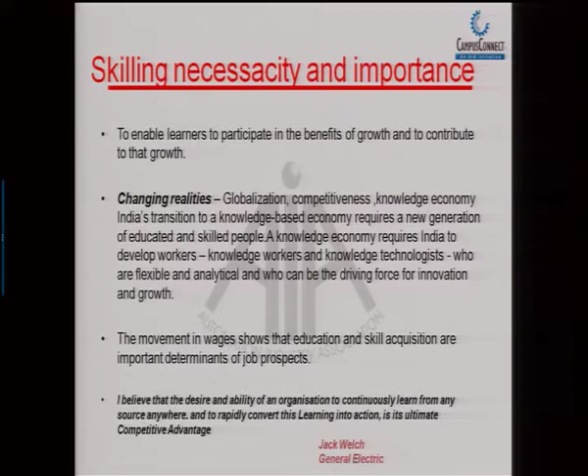In today's world, if we are not competitive, or the industry is not competitive, they are nowhere - they get outbeaten and lost. In order to be in that competitive race, one has to be continuously learning and able to acquire those skills and put them into action. That is where the need for skilling is necessary.

First of all, from the organization's point of view, why do we train? We train to prepare our workforce to be effective in the markets, agile and responsive to economic changes. This is the main criteria - that is, in turn, organizational readiness.

If people are able to put themselves or are agile enough to accommodate various changes, that is their organizational readiness, which comes from two factors: motivation and knowledge. Motivation has to come from within or has to be driven. The knowledge part has to be acquired through training, through skilling. All these things have to be included for an organization to be ready to meet its challenges.

If you look at how training scenarios are changing, the demand for training has become incremental - it never stagnates. Technologies are upgrading so fast that naturally if people stick with old technologies, they are unable to cope with the situation.

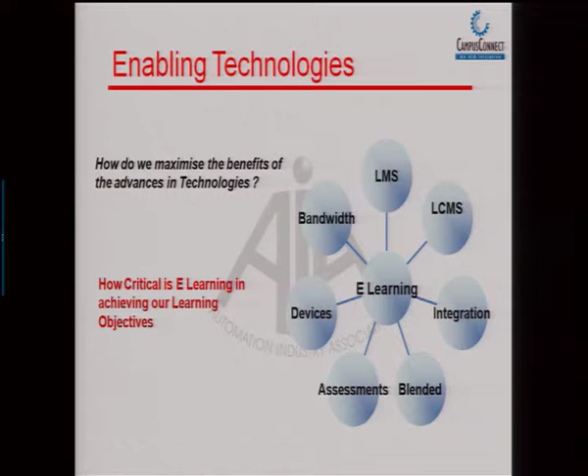Now looking at what this blended learning is, and what its benefits are, you see that you have a reduced learning time. Why reduced learning time? Because the more senses you involve in your training process, the better the learning is. If you just use your hands and do something, that's somewhat okay.

If you also have something to hear, something to see, and all those things, that makes your training complete. So the training effort has to incorporate the maximum number of senses available to you in the learning process, by which the training can be more effective and more retainable.

In order to do this, e-learning is one of the processes. What happens is, you have visuals, you have audio, and along with that you are working on it yourself. So your learning time becomes much reduced.

For the same reason, you also have better retention. You could retain those things because you are employing the maximum number of senses into those efforts.

You can also ease into using this because of variable learning speed, since it's not a classroom, a 60-minute sort of session where everything is dumped into you and you have to go through all of it. You could do it at your own pace, at whatever learning speed, at whichever time you want, and however many times you'd like to learn.

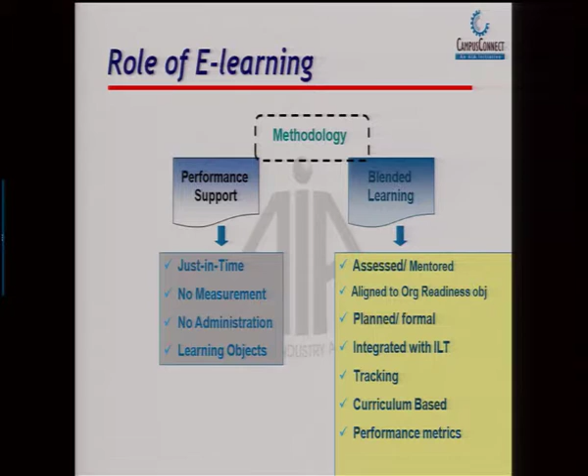So the role of e-learning can be on two facets: one is to support performance, and the other is to augment the blended learning process. In performance support, it is just in time, there is no measurement, no administration, and the learning objects are there. Whereas in blended learning, it is an assessed and mentored process, aligned to organizational readiness and objectives, planned, integrated with instructor-led training, tracking is possible, curriculum based, and performance metrics are also available.

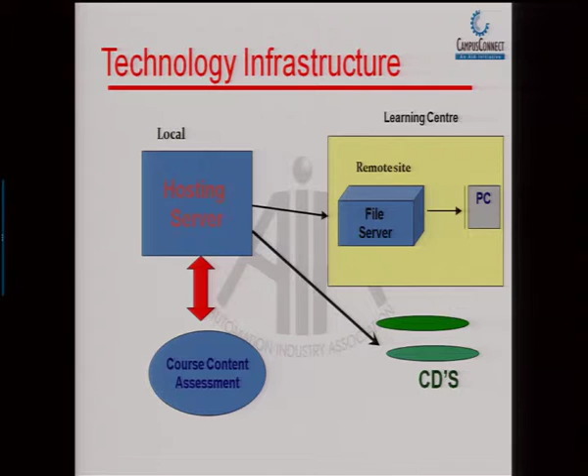So how are we going to deliver this e-learning? Of course we all know that, but still: you have the course content hosted on a server, and from there, through local arrangements via a file server, you load it into the PC, or through CDs, or whatever the means. So we will look at what is new about e-learning.

So, way back in the 90s, you had computer based training, CBTs as we call it, where certain things were available on the computer by which you could go through them and graduate yourself into those technologies. Then later on, we had the web based thing, like when the web was in full swing, where you could have this material available through the web and use it so that your training needs could be fulfilled.

Then there was the classroom manager, which is basically a sort of LMS arrangement which can be used for learning purposes. Then it became a knowledge portal over the web by which you could access them and according to your requirement get those contents delivered at your place.

Of course, there was also the e-campus, which is spread over the entire area. Say if you have a plant with thousands of workers, throughout the plant you wanted this technology to be available for your requirements, then you have the e-campus also.

Of course, Tec2Screen is again another thing, which is real blended learning, a recent development where you have the iPad which gets connected to all these hardware peripherals by which you could do training, both software as well as hardware. The content is there on the iPad. Then you have connectivity links developed which can relate to the hardware by which you can make them work. Again, Tec2Screen was around 2014.

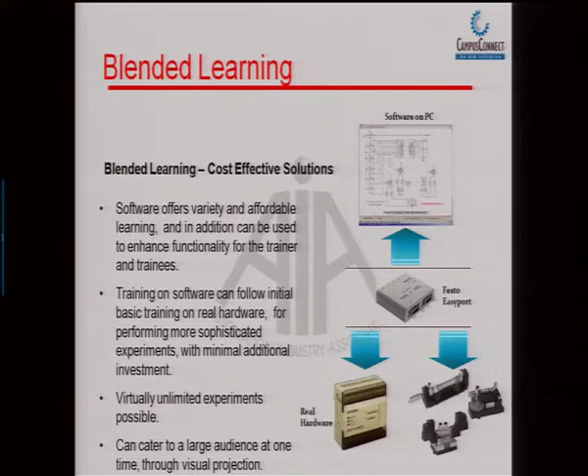So blended learning here is one such thing, like where PLC works with process simulation software. So you have something virtual here, this is a virtual arrangement. You have some hardware connectivity there, then you have the PLC.

What you could do is address a thing that could really be existing in the industry, or which could be a requirement in the industry. So here is an arrangement where wine bottles have to be filled to a particular level, and it has to be capped or whatever is the thing. This process, of course, we could write a program for, looking into all those constraints that have been described.

But still you are not sure what is going to happen, whether it is really going to work. In those situations, you put a doubt into whatever your learnings are, or whatever you are demonstrating. That's where this blended learning arrangement helps, where the software comes into aid, where you have the physical realities in front of your screen, which can also react to whatever inputs are given through the PLC, by which you could confidently say, I have programmed such a thing, or I have worked on such a thing. That is where the effectiveness of blended learning comes in.

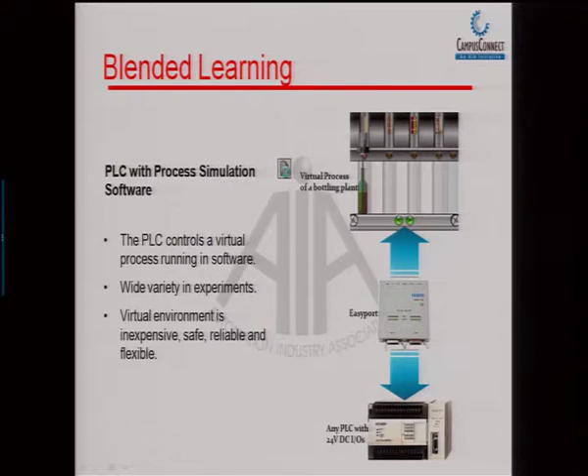So to explain this, the PLC controls a virtual process here. You could perform a wide variety of experiments there, and you could deliver this. So I will just open this. It is also available on the net.

So you have a water tank here, just to give you an example. You have those levels telling about the minimum and maximum level. You have the heater there, and you have those valves to open and close. So how do you meet this requirement?

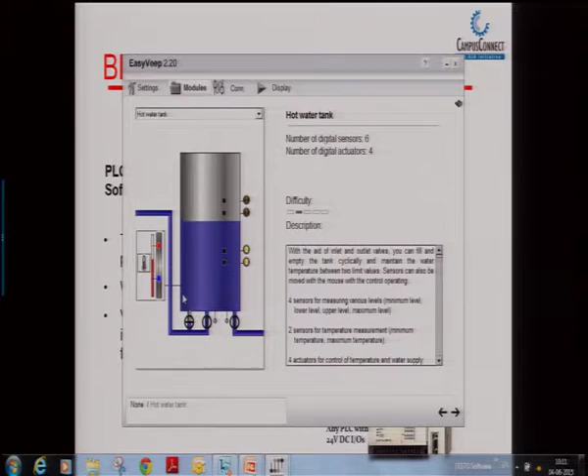This could be a requirement in the process industry. You have some chemicals which have to be kept at a particular temperature and at a particular level, and it has to be opened at this sequence, and all those requirements, which could be a physical reality.

So in order to meet those requirements, having PLC knowledge or programming knowledge is one part, but really putting them into your on-the-job situation could be a little shaky at the beginning. So you have an experimental situation where, in the classroom, you could develop a program for it by which you could really control the process and have confidence in yourself, saying okay, I could manage this and I am capable of doing that. That understanding, that knowledge that I can do it, is what skilling is, for which this blended learning comes in a long way.

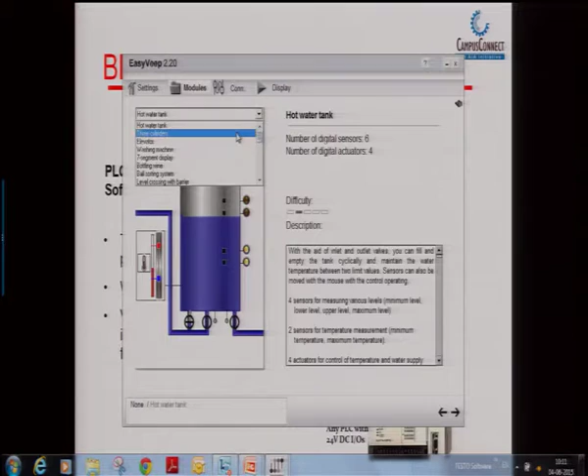So this is one such process. Similarly, let's say you have a 3-cylinder situation like this. You could use hardware and try to do them and acquire those skills, but here is an arrangement where virtually you could try to do this thing. There are plenty of these things available.

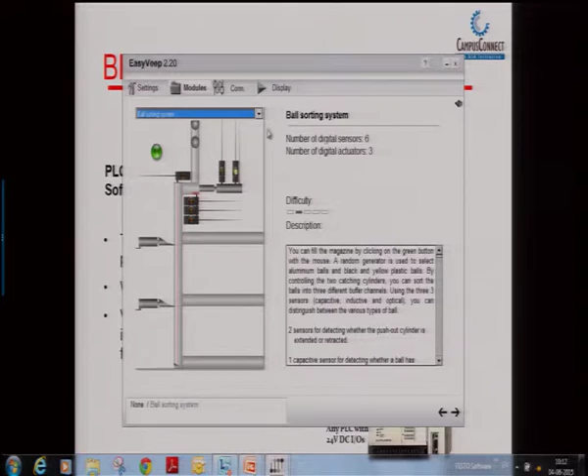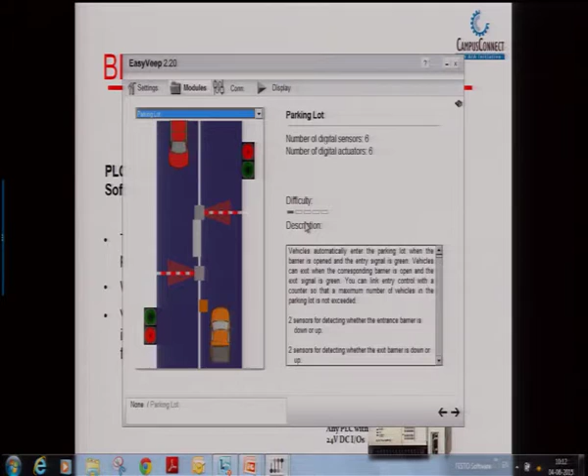So ball sorting, or some parking lot where you are going to manage the parking lot based on availability of spaces, and all those things. All this is now driven by an internal program that has already been developed, but of course, if you connect it to the hardware, you could emulate it by writing your own program. There is a possibility for emulation when you connect it to the Easyport, one of the devices which can make this hardware and software get linked. You could do this yourself, something like this.

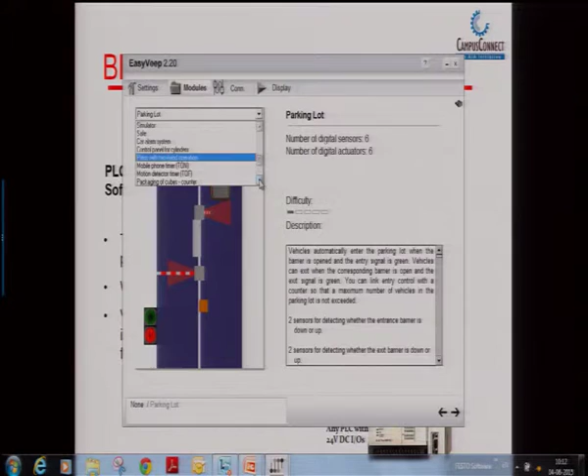Similarly, some garage door or something like that. Okay, so that is just a small glimpse of this.

So, we were just talking about how this can be managed and how this brings confidence from having learnt or skilled oneself, and how this blended learning tool can aid in those processes.

So, we will look at how it can be controlled. It need not be this particular software, it can be any software for that matter.

So naturally you have this as the hardware, or you could also have some other input devices by which you can send a trigger into this, so that it can make the software move the way it should. So all you see here is the connections.

This is the central junction bridge between the hardware and the software. You have the power supply, and the cable being connected into it, which connects into the computer, by which you can run this virtual process with the help of this hardware arrangement.

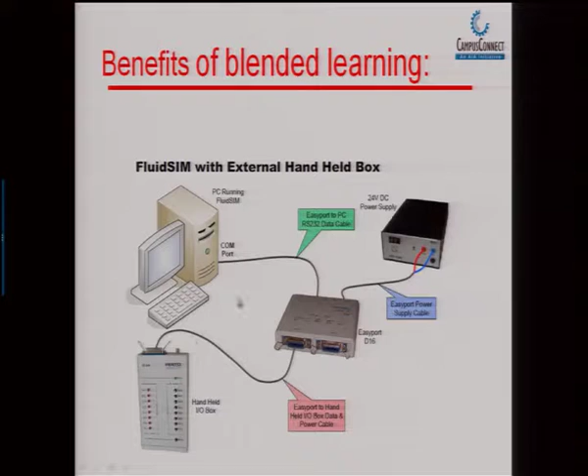Again, you have a PLC, not any specific PLC, you could use any PLC for that matter, where you have something on the software side, you have the connection, and some other interfaces by which you can connect it to those devices, which can address this signal and finally reach this place.

So again you have a physical arrangement, maybe those relays, with signals coming out of those relays, and if you want to address your system on the computer, you could do it by linking into this box all those physical signals and addressing it into the computer through this device.

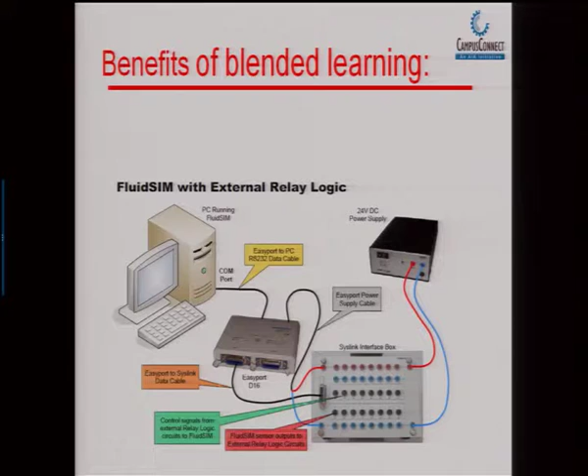So here again we have the possibility of a relay managed arrangement, where the software is made to work with the help of this.

And of course we saw a physical hardware which can control the software. We also looked into the other arrangement where a relay logic can again manage the arrangement.

And here we have another thing, that is the PLC. Now even if you would like to connect your PLC signals into the software, you could do so by just connecting it the same way as we did, only replacing the device.

So now you see how many technologies are getting involved here, and the scope for learning on one platform is getting enlarged.

So you get multi-skilling, you have some IT exposure getting involved here, some mechanical elements, some relay and PLC logics, all for making something virtually move on the screen. That is where this blended learning becomes a very effective tool for learning.

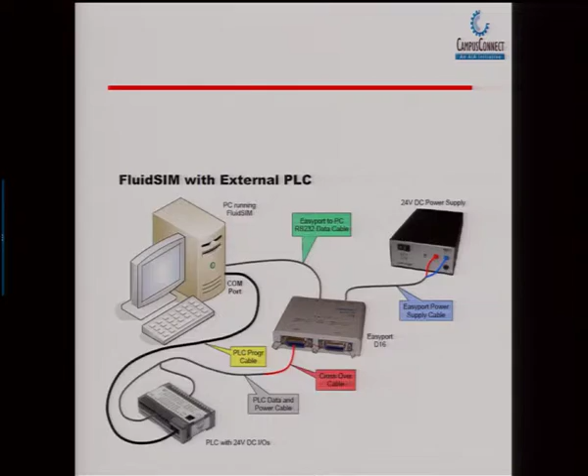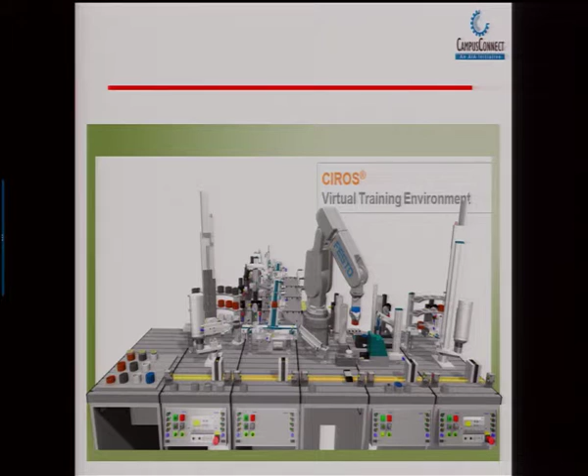Of course, again such complex arrangements like mechanical arrangements where there are lots of actuators, sensors, robots and all those things which need to be controlled - again this is not a problem. It is still possible to work with those arrangements with the blended learning arrangement.

So what is the reason, or what are the possibilities of having this blended learning? So first of all, you have the flexibility.

As we saw a little earlier, we were using hardware, we were using relay based controls, we used PLCs in order to do that. So such a big variety of arrangements can be incorporated into our learning situations. That is a big advantage in using a blended learning tool.

Of course, safety is another big factor. You always fear what will happen, whether that fuse will go or that CPU will burn or something like that. This fear is always there when you are first hand working on those things.

But look at the virtual arrangement - you do not have any such fears, there is nothing that is going to be damaged. All that can happen is that your program or whatever your thing cannot physically work. So this equipment safety is one big advantage in using a virtual arrangement as a blended learning tool.

Of course, it can be adapted to varied situations. You can use it for PLC training, logic training or some other hardware training, or you can extend it to varied other technologies, something like robotics, or you could use DC motors or something like that. So you have the scope to expand to whatever the limits are.

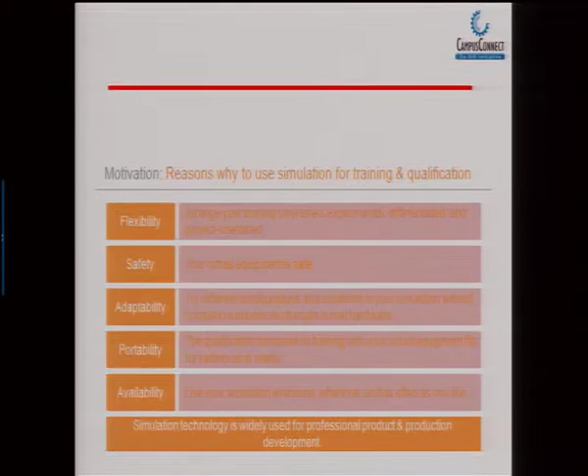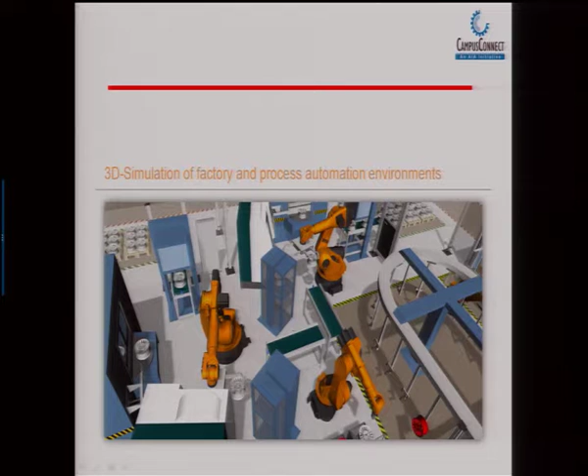Here is an arrangement where you could see a 3D simulation of a factory and a process. This simulation is actually a blended learning arrangement where you could physically move all these things if you were to program it. So you have a physical situation which can be controlled virtually through hardware arrangements.

Coming back to the uses of blended learning, robotics are becoming the need of today, with a craze for learning these things in a big way. It is difficult for us to bring all these robots into our classrooms to learn them. First of all, they are very expensive. Secondly, the technology is not very familiar to us, so it creates a fear that we may spoil something. In those situations, virtual learning or learning through blended arrangements is going to be very handy, so you could do robot offline programming with this sort of virtual arrangement.

You could look into the kinematic simulations of these robots with very high accuracy, and teach them on the software or with a teaching pendant from outside. In some cases, you also have controllers available where you can straight away download your program, whatever is developed virtually, into those areas. And of course there is also collision detection and all those things, and it doesn't stop there, it spreads to a wide array of things.

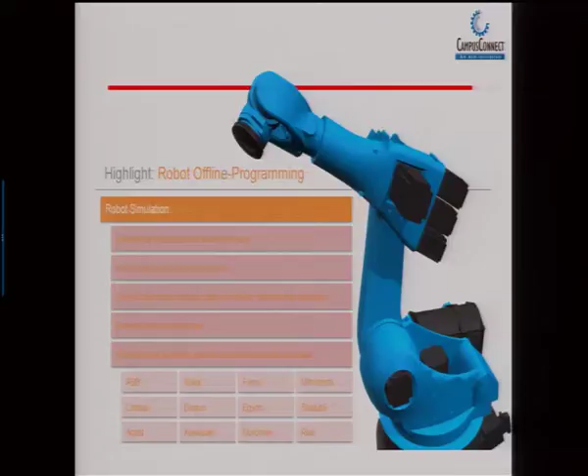In your classroom or hardware training situation, you are not looking at only one equipment. You have an array of sources by which you can work and make use of this training. That means you have so many possibilities, like ABB, Comau or Adept, Kuka, Denso, Kawasaki, something like that. So you have the scope to use such varied sorts of robots into your applications. It is available in the new version, so you have such huge varieties of platforms that you can use.

So you would now feel the advantage of using blended learning, how really it is going to be cost effective. You would be dumping your labs, or whatever the physical arrangements, and maintaining them over a period of time is really going to be a very costly affair, which will deter you from making use of those arrangements in training situations. But this virtual learning platform can help you bring such arrangements at your fingertips and in a very cost effective manner.

Not only that, there may be one common compiler which you use to send signals and make things actuate, but you could also do programming in a native language with this. So these facilities have also come into this sort of controller. So you could have Mitsubishi MELFA BASIC 4 or 5 or 345 which is MRL, then KUKA, then ABB Rapid, then Adept, Stäubli robots which are V+, then industrial robo languages as options that can be used. So you have so many things, and apart from that, you could also have those compilers integrated into the arrangements if you wish.

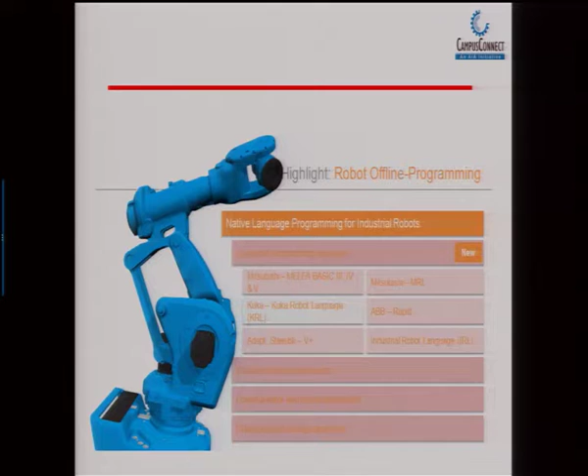So specifically you could do Mitsubishi robo controlling, and you can download and upload from the robo, which comes as default in this software, whereas other compilers like KUKA or ABB, Fanuc and so on have to be procured additionally.

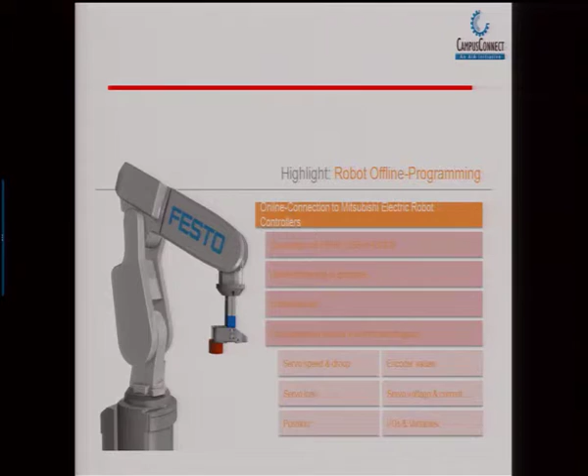So you have these robots virtually, as I was telling you. Let me go into how it is happening. You have a student workplace, and in these versions you bring in whatever software or robo we were talking about into those libraries, prepare a position list, do the programming, and start to simulate. So you have the robo working in the same manner as desired.

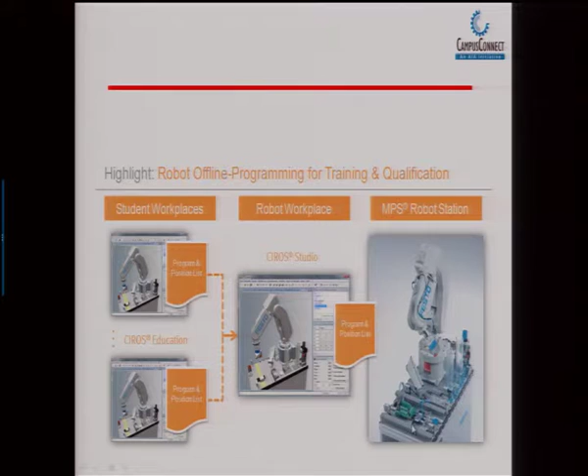Or else you could create your own work situations, like in a studio sort of arrangement. In this case, you could devise this robo according to your requirement in terms of sizing and make it work. And of course you can also use it along with the mechanical elements in the case of an MPS sort of arrangement.

Certain PLCs have an inbuilt soft PLC, meaning there is a possibility for you to execute that program as such. It doesn't require hardware where you have to dump it and prove it onto the real time situation. You could run the program internally because there is a compiler which runs the program and delivers you, and you can also test it. Especially in Step 7 you have this possibility. There are other brands also which have inbuilt software already, where the software has got a soft PLC. If you want, I will show later if there's time.

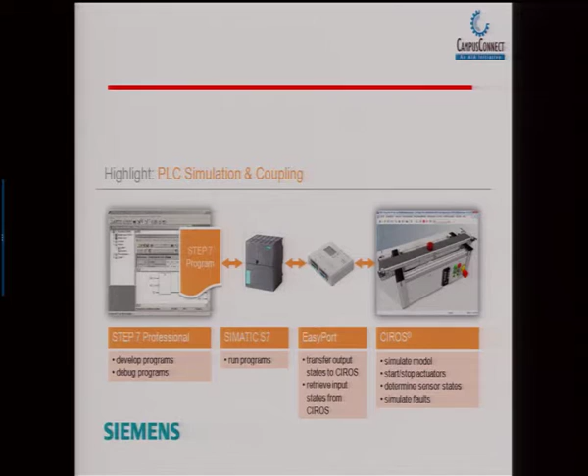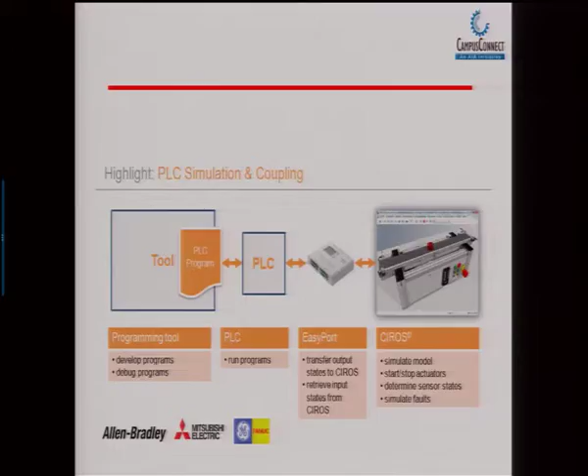So in the earlier case I showed you the physical hardware which is of a particular brand, but now we have any generic PLC, whatever is available, you could just make them work. Of course, it has to relate to this device, which is again a 24-volt signal that can be handled at this place. So if that is the case, then you can really make this hardware work with the software as such.

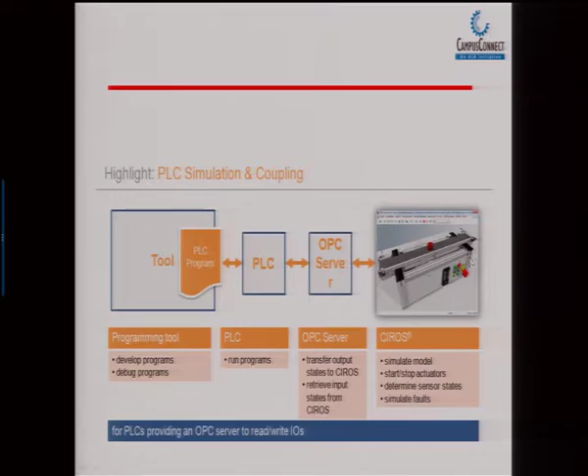Or you could do it with some OPC server also. You write your program in the programming tool, dump it into the PLC. From the PLC, through the OPC server, you are going to drive this arrangement. So many possibilities and so many technologies are getting involved in this sort of arrangement.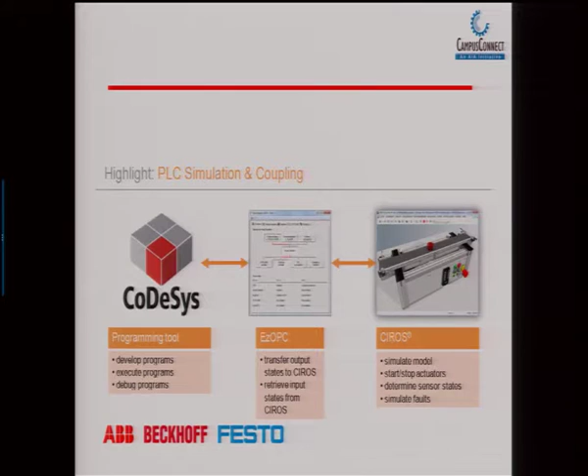What is Codesys? Is it related to ladder or something? No, there are 6 languages on which you can do the program. It is developed by 3S or something, a company in Germany. So it is code independent, meaning you need not have it connected to a specific PLC. It can address any PLC for that matter. Independent platform, code independent - that is the advantage here.

So you could connect to a Siemens PLC, you could connect it to an Allen Bradley PLC, you could connect it to a FESTO PLC, like that. The PLCs are one part and the software is another big cost which you have to incur. So in order to handle that, as per this IEC convention, they have developed and recommended code independent sort of softwares.

It's not C kind of thing, it is like the normal one. I have got it in the material, we will see at the end if it is there. So it is just any normal thing. See, what happens is the logic is always the same in any PLC, only the front end becomes different, and manipulating or understanding how to use them is what is going to be time consuming for at least some time. So in having this, you have always one neutral platform on which you could do your programming, then connect it to varied sorts of PLCs.

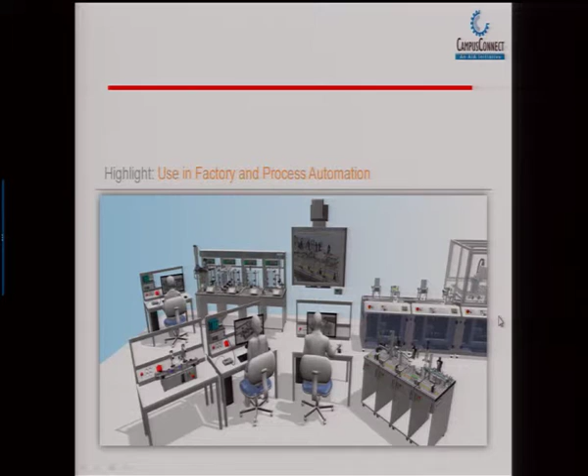So you could use factory automation as well as process automation with this sort of virtual arrangement, or you could use such complex situations where you have transportation, storage and all those things, real time situations which can be done with the same speed and real time accuracy. The softwares are so powerful that they can replicate the actual situation in the same time frame.

So it's not some learning tool which is just there as an arrangement to learn, but it will give you the exact physical realities. Even NASA tries out their robotic arm with this software.

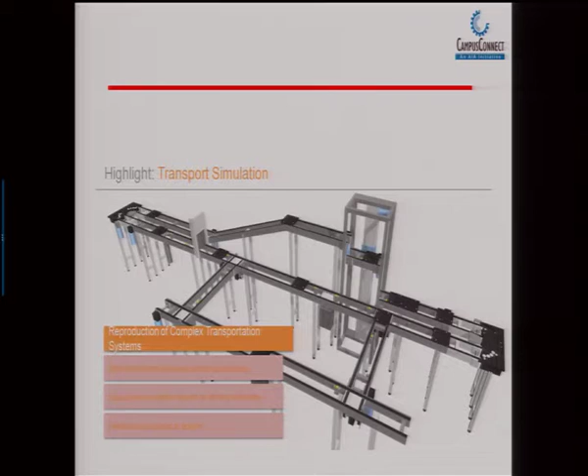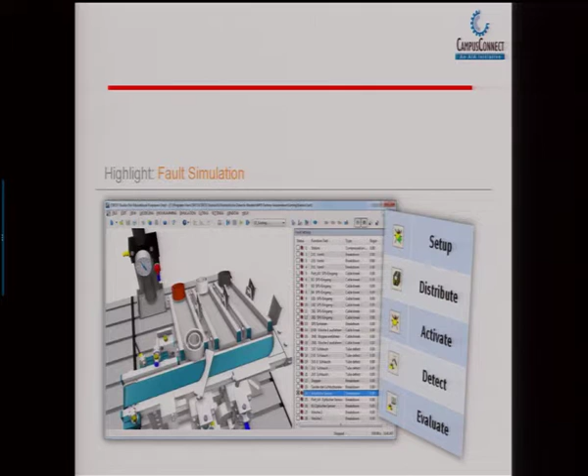Of course it doesn't stop there, you just have to learn various technologies, you have possibilities to connect them, but in a learning situation you also have to learn by experience, by creating faults. There could be situations where you could actively employ into those arrangements, so there is also a fault simulation mode, where you could set up a fault, then distribute it and activate it and evaluate it at last.

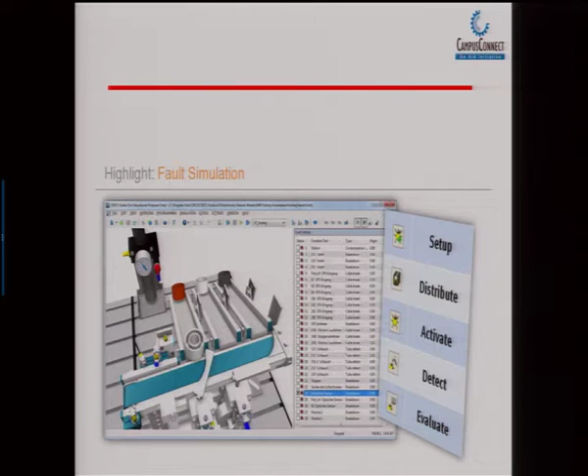So the faults could be something like this. It could be related to compressed air, or breakdown of cables, or maybe some valves getting jammed or permanently failed, or some other problems, and these can relate to certain effects, and the components related to it can be identified.

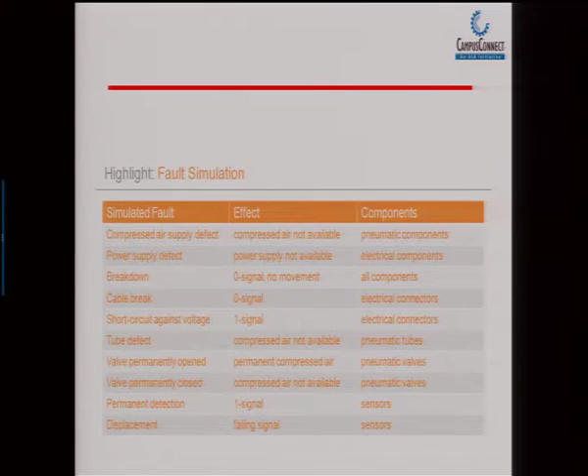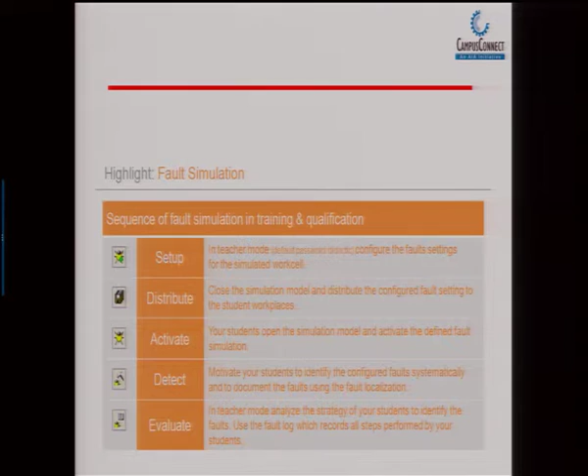So this is the process because this is a learning tool. Naturally we need to have this to create some faults. It cannot be always doing something with your brains, but also to do some maintenance and that sort of thing, which can make the training much more reinforceable, by which the training can be really very effective. For this we need to have a fault simulating arrangement, which can also be easily accomplished with the help of this software.

This is about the various possibilities using the blended learning arrangement. I will take you through certain things like physical arrangements - you have a rotary arm, a pneumatic actuator controlled by valves, a vacuum suction gripper controlled by one of these valves, and a start-stop arrangement to make this work. You could construct this physically and program the PLC to run it, but here we are using a blended learning arrangement.

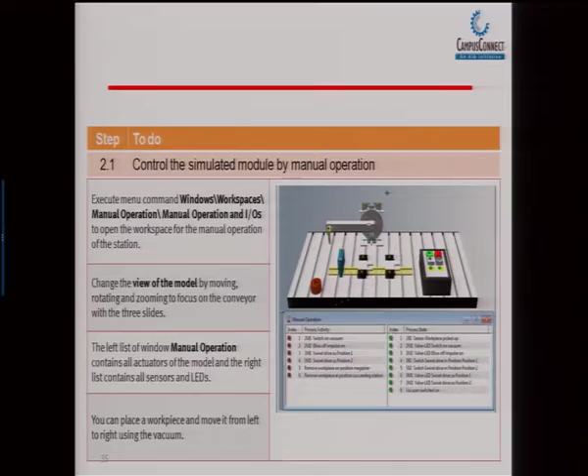So you could have the screen available to you, and make this run with the help of the previously described arrangements. Either you connect with the interfacing device to the hardware, or do it with relay-based logic, or with PLC logic to control the movements expected in this situation. This could be a simple task required at the job front.

So you could easily accomplish it without having to incur costs on the equipment. Maybe we do not have a rotary actuator itself - so how to use that is a question. You do not know how to use vacuum either. Naturally these situations can be managed with the help of this sort of blended learning arrangement.

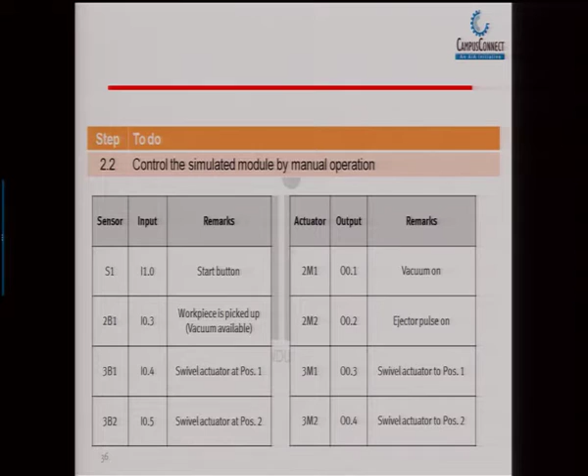Of course, there are these IOs, each referring to which signal inputs and which output states it can reach. So we look at one possibility here - you have the software that is going to simulate the pneumatic actuator. All you have to do is take those OPC components, address those signals.

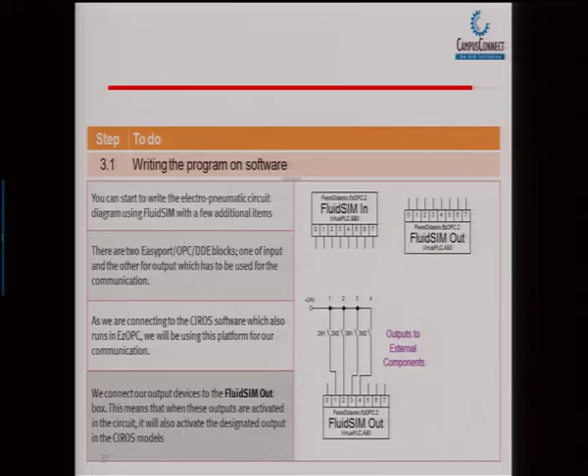And send it into the outside world through this FluidSIM out - this is the EzOPC component available. So what happens is, when these signals are triggered through one of those means, either through a push button, relay control logic, or PLC, this 2M1, 2M2, 3M1, 3M2 are triggered in the software. When this trigger happens, it goes into the outside world through FluidSIM out. So if you collect them at the peripherals there and connect it to those 2M1, 2M2 or 3M1, 3M2 on the reality side, whichever is there, you could see them working either in the hardware or simultaneously in the software.

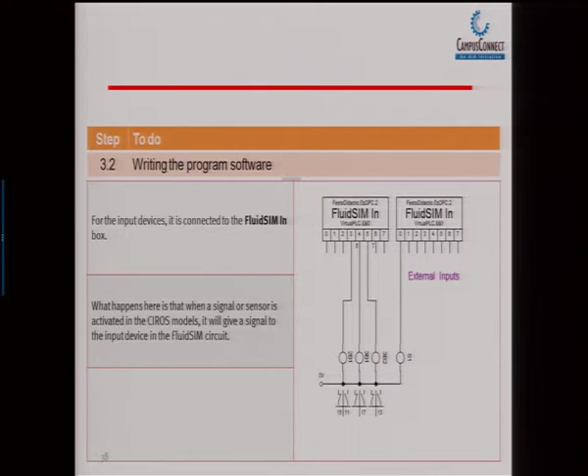Similarly, you could also bring outside signals from the field into the computer. That means you have a screen designed exactly like the controls - a rotary actuator, two solenoid valves, and all those things placed, and you are trying to move this. So how do you run this from the field? The field signals can be triggered with those buttons that are presented to the valve there, making that thing work.

Those same signals can be linked into the device that is connecting to the software. So you have the signal addressing the physical solenoid valve there, and at the same time that can be connected to the device addressing the software. Both these things work simultaneously - movements are virtually displayed as well as happening actually. The signal strength does not get diluted - the 24 volt signal addressed at the solenoid valve can address there also. Parallelly, it is brought into this device, converted into a 5 volt signal to address the PLC here, and those are recognized by the OPC components built into the software, which makes this thing also move.

In electro-pneumatics there are varied softwares available to control those situations, which you would have tried in your practical lab experiments. You have very complex relay-based logics which can straight away run the thing. If you try to simulate it - if I click the start button, this relay gets energized, and this contact of the relay, wherever it is linked to whichever solenoid, starts to move there. If that solenoid is addressed to one of the cylinders, the cylinder starts to move. This can be done very easily here.

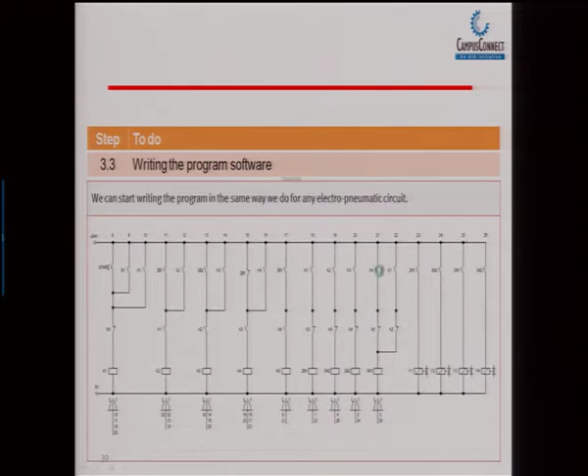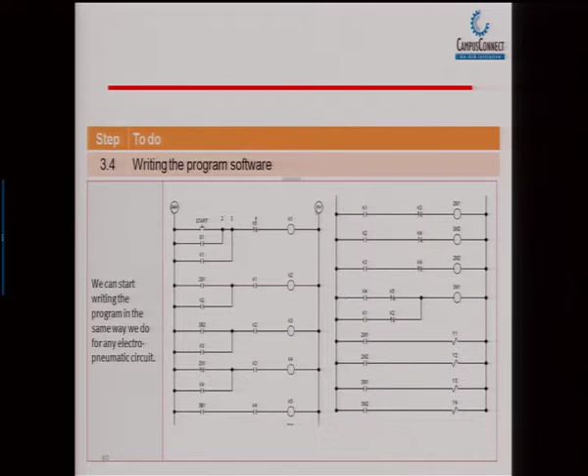But you could also take this, maybe in the parallel form like a PLC logic, or as I showed in vertical rows as rungs. So in whichever way you would want to have it, you could have it - all you have to do is take those signals, with termination taken into those outputs.

So, you have 2M1 which are the outputs set on different solenoids there. So, those are all set into this output which can be addressed to the outside field signals. Similarly, whatever field signals you are creating from the outside is connected into the software, and if those signals are coming from the field, it can also affect the virtual thing. So, both ways it is possible to control.

So, this is what I was just talking about. These are in the software FluidSIM connection script which you are showing for the IOs. Those are inside the software. FluidSIM Out, FluidSIM In is there.

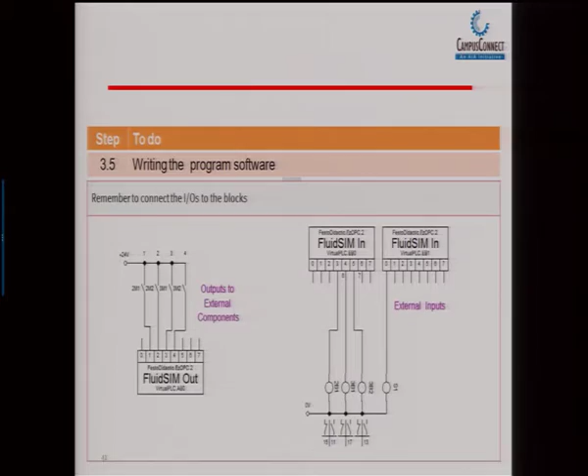You need not try such complex things. Simply you can try one output into output and see whether it is really reflecting at the field or something. Then you can gradually try. So, if you have many licenses of that, simultaneously many people can work together like that.

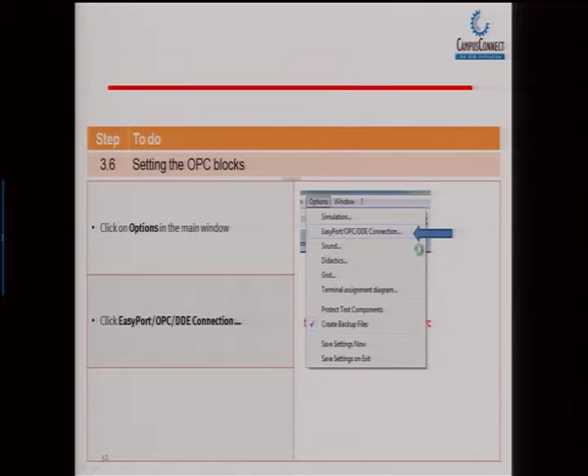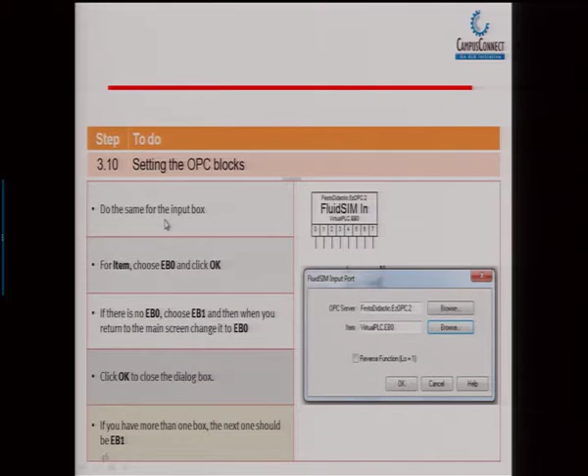So, this is again the blended learning, and of course, the means to do that is you have to click the OPC output, the devices, then enable the OPC mode, then connect this program into it and address the particular outputs into the virtual controller, virtual PLC, and finally link it to the FluidSIM out or in.

And also address, make the connections to the same thing. So, you are addressing, let us say, this software and this is your controller. So, you are linking them here.

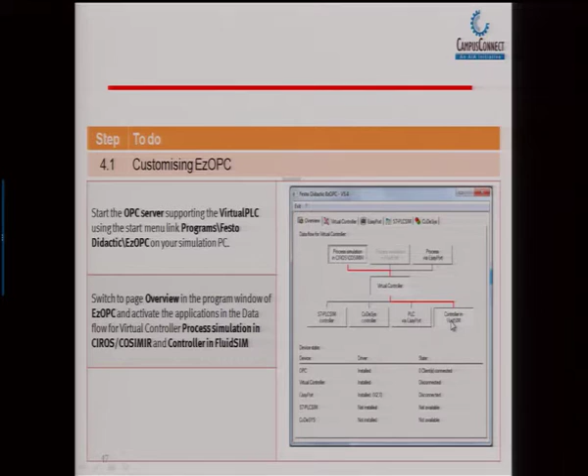You can switch between any of these things, like you could use an S7 internal PLC or a Codesys PLC or some other brand of PLC, and in this case use this particular software to drive this arrangement.

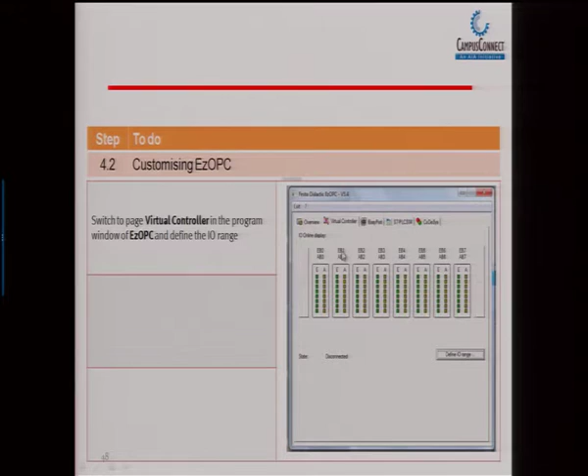And this is where this virtual controller is exchanging data from the field as well as from the virtual world. So, it is simultaneously transmitting whatever is coming from the virtual thing through those outputs here, and similarly receiving the signals from the field into these places and exchanging with the software there. So, you could choose any one of them, EB1 or AB1 like that.

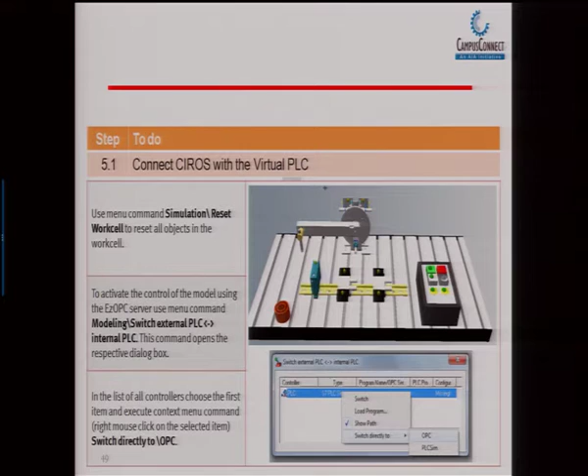So, by which you could now run a virtual arrangement without having those physical requirements. So, this is one possibility like that.

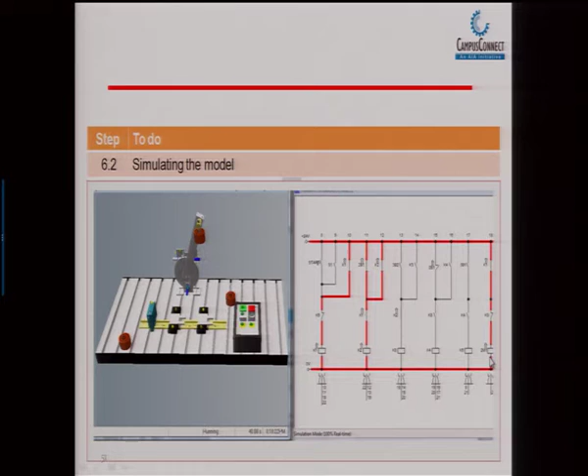So, you would have this things working in this manner. So, you will have this one to one. So, that will address this thing through this OPC server. Similarly, that is one part, that is using a software which is having such complex inbuilt mechanisms, incorporating many technologies into that.

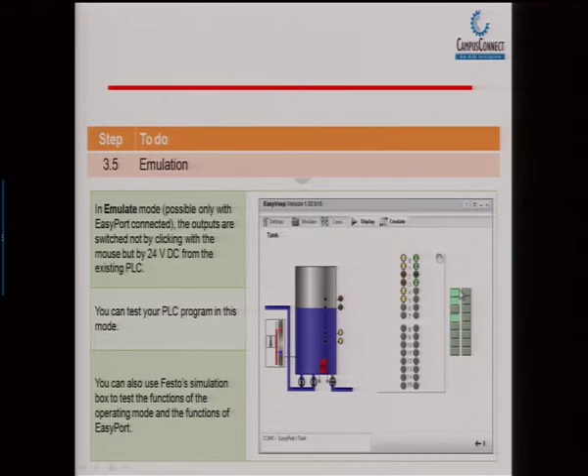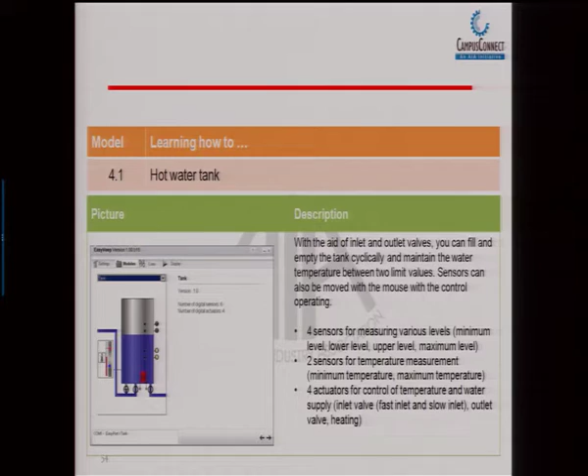You could also do with the virtual sort of thing, like EasyVeep, as I was telling you, is available on the net. You could still program to those arrangements, looking into the explanation that have been made there. So, you could make this water tank fill to a particular level for a particular temperature and all those things. Similarly, the cylinder. So, I am going a little fast on these things.

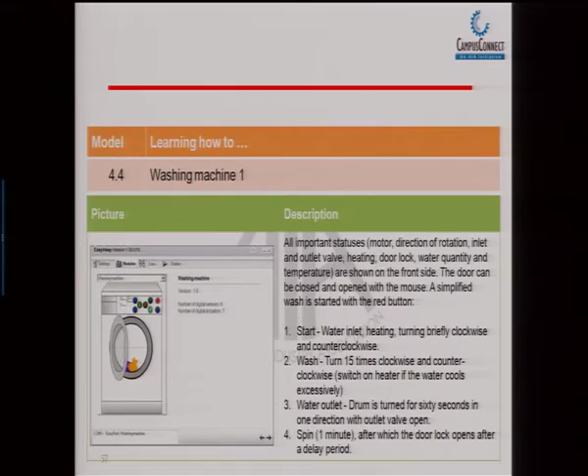This EasyVeep is exactly what? EasyVeep is a virtual pre-configured exercises. We can call it as exercises or physical processes which are available. They can be downloaded, or it comes with the easy port default. It is also available on the net, or at least on our site for downloading.

So, with this, I think what happens is your PLC programming task becomes real time to the processes. That is the big advantage in using the EasyVeep, rather than just looking at some imaginary situations where we are trying to drive them. You have something that is a meaningful sort of arrangement, or a task oriented approach to do that. So, that makes really the skilling much more meaningful in learning situations.

So, like this there are about 28 tasks or something like that I was told. So, you could do that.

So, that is about what is this multi-skilling or blended learning as a cost effective skilling tool. So, what we saw here was the possibilities of learning here. First, we looked at why we have to have this, what is the need for it. Then we explored various possibilities available for these purposes, and we looked into how this can really bring in such cost effective training solutions and more objectively targeted training possibilities. So, with this I will just conclude my presentation.

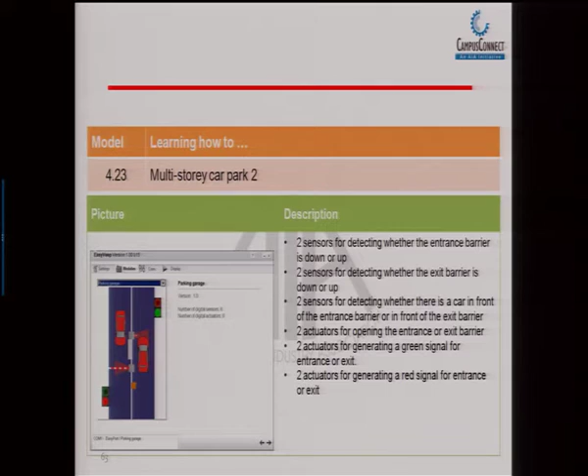We have 5-10 minutes. Yeah, what was that? Any specific thing like?

Sir, in this blended learning, I think you are combining software and hardware. But how is the training provided? Is it centralized training so the trainee will come to your place and get the experience of software along with hardware? Or can the software be at the trainee's place and the hardware at your place, so the program can be run remotely?

See, blended learning, as I was telling you, there are various licensing methods we were looking at - different licensing methods. You could have a standalone arrangement, or a networked sort of arrangement, and all those things. So you could opt for any one of those.

But if you really would like to interface with the systems, with the hardware, naturally it is a scaled down arrangement of meeting varied technologies with the help of one particular tool. The tool is going to be your virtual screen, which incorporates all those technologies in one place, and the triggering mechanisms could be through your hardware, something like that.

So hardware you have to buy? One piece is enough for that matter. Yeah, something like that - a kit like thing you have to buy, one of them is enough. Or else it is not necessary to use the hardware, it can also replace that if you are content with it, with everything running on the screen as such.